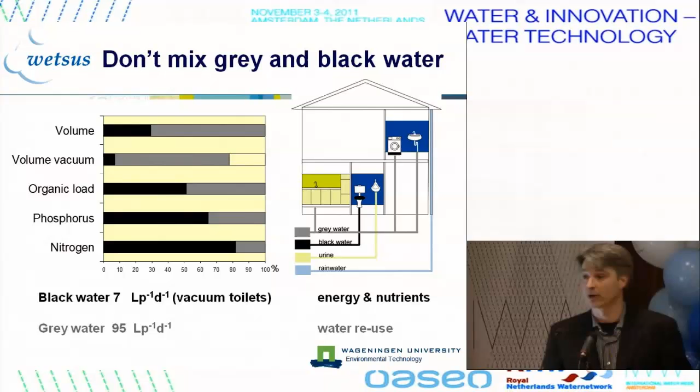Now, this is a demonstration project in Sneek, which is in the north of the Netherlands, and around 32 households are connected to a grey water and black water system. The black water treatment is in the garage of one of the inhabitants of this area. But we collected the brown water, the black water and the grey water and transported it to our labs to do all kinds of experiments.

Now, this is black water composition. This is from a monitoring session of around 3 years, which confirms that the COD is very high. If you calculate it theoretically, it should be around 25 to 30 times as high as in sewage. So you can gain energy from it, and also the nitrogen and the phosphorus concentrations are relatively high.

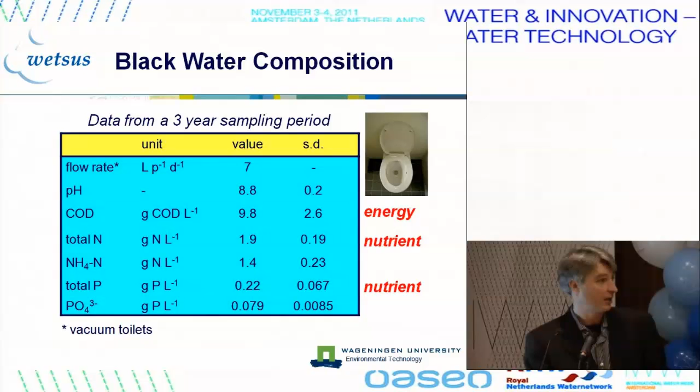Now what we did is we treated this black water in a system consisting of an anaerobic reactor, in this case UASB, then an autotrophic nitrogen removal unit. We were not recovering the nitrogen because we had this rule of thumb that if you have nitrogen below 5 grams per liter, it's useless to recover it and you should simply remove it. It's a different case if you work with urine, for instance, then you're above this 5 grams per liter and then it's worthwhile recovering it.

So we removed it autotrophically, obviously, because we already removed the organics and transformed them into methane as an energy source. And then after the nitrogen removal, we recover P, and that's all we do. We didn't look at the removal of micropollutants, we just looked at the behavior of micropollutants in this system.

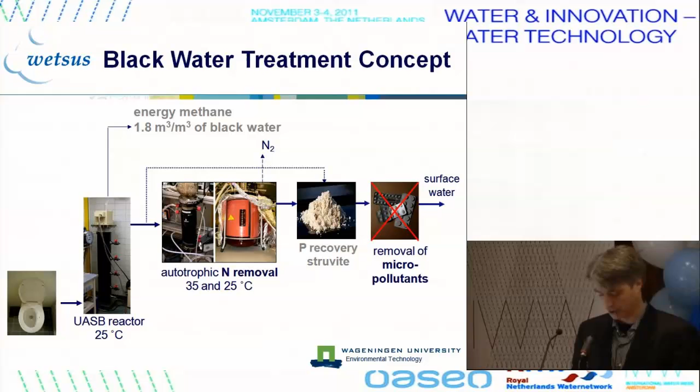Now, if you look at the performance of such a black water system, then I focus a bit on energy because I think it's important to share that with you. If you look at the black water system, you could recover this amount of energy, that's in megajoules per person per year. And if you compare that for the full treatment line of conventional wastewater treatment plants, you lose around 107 megajoules per person per year.

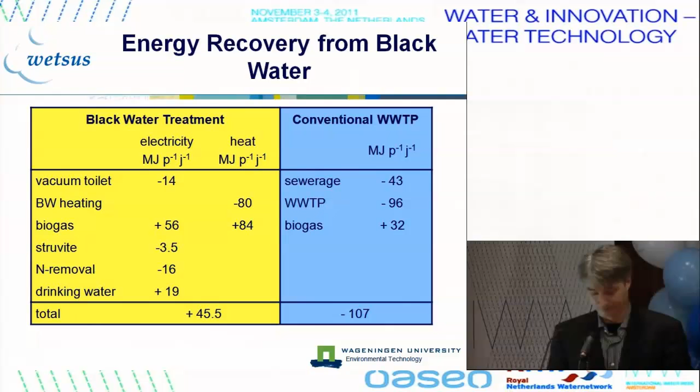So you have a net energy gain from a black water system, which is, it's not a lot, around 5 to 10% of your electricity consumption in your household, assuming that you use around 3,000 kilowatt hours per year. So this is, in terms of energy, a very interesting system.

Now, if you look at the treatment performance, it's not as good as a sewage treatment plant, which is obvious, but if you look at the loads, then the loads for COD, nitrogen and phosphorus are lower than the loads that are discharged from conventional WWTPs. So the concentrations are much higher, but the load is lower.

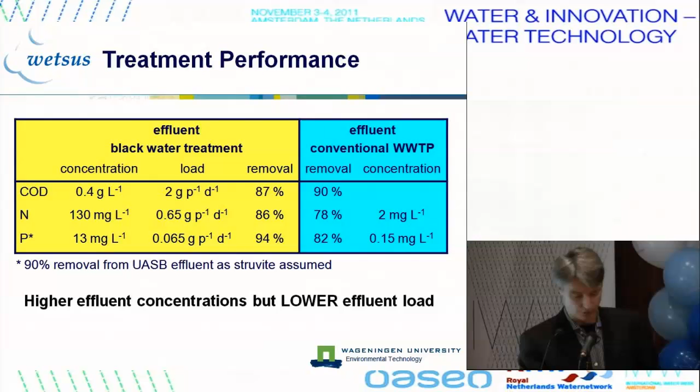Now, micropollutants. And in the case of black water, we're talking about pharmaceuticals. In black water, they are theoretically around 25, 30 times higher than in sewage. That's one thing. They are only partially removed, as far as we know, in wastewater treatment plants. The risks are very difficult to assess, and several effects were reported.

Well-known effects are this feminization of fishes by ethinyl estradiol, and also by Prozac, for instance, in the United States, a reduced freshwater mussel production. So there are some worries, and therefore we decided to start monitoring these pharmaceuticals in black water systems.

We had some selection criteria, which are quite logical, I suppose: that they have potential harmful effects in the environment, reported effects, the consumption, removal in wastewater treatment plants, and we decided to look at several therapeutic groups. Now, these are the compounds we looked at for the black water system.

So we have an analgesic, paracetamol, 2 beta blockers, antihistamine, some antibiotics, some anti-inflammatory compounds, steroid hormones, and an antiepileptic compound. And I'm going to summarize the results in this graph. These are concentrations from left to right. This is, for instance, for paracetamol. This is in the black water. And all compounds were detected in the black water, apart from the hormones, strangely enough.

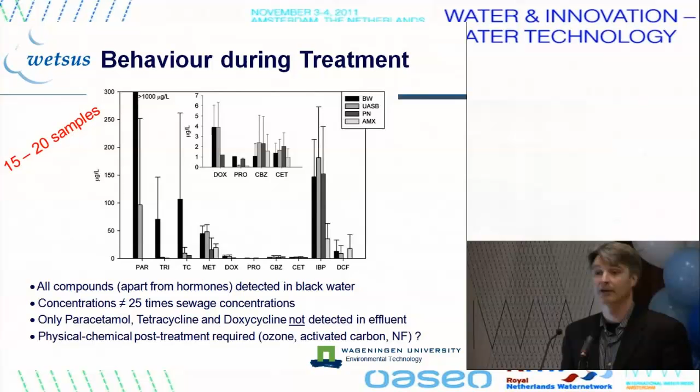Only 3 compounds were not detected, apart from the hormones, in the effluent of the whole treatment line. Those were paracetamol, tetracycline, and doxycycline, which are antibiotics. Now, you could conclude that you need physical chemical treatment because all the compounds are still present in the effluent, but that's of course risk dependent. We don't know. We know that these compounds can be removed quite well by ozone, activated carbon, even nanofiltration. Whether it's really necessary, I cannot say.

Now, then we look at grey water, same procedure more or less. We want to reuse grey water after sufficient treatment for several purposes. And therefore we treated this grey water in 3 different biological systems. We had an aerobic reactor, we had an anaerobic reactor, and we had a sequence of an anaerobic and an aerobic reactor, all operated at the same hydraulic retention time.

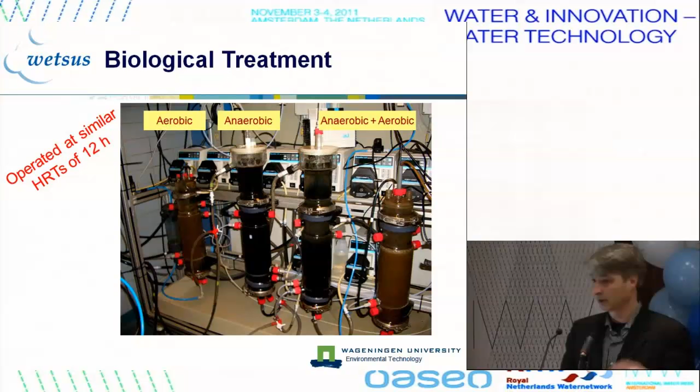Now, if you look at the performance in terms of COD removal, so organic removal, then the aerobic system behaved the best, as you could expect maybe. The anaerobic system, to our surprise a bit, behaved not that good. And probably this is linked to the presence of anionic surfactants, which inhibit the anaerobic treatment process.

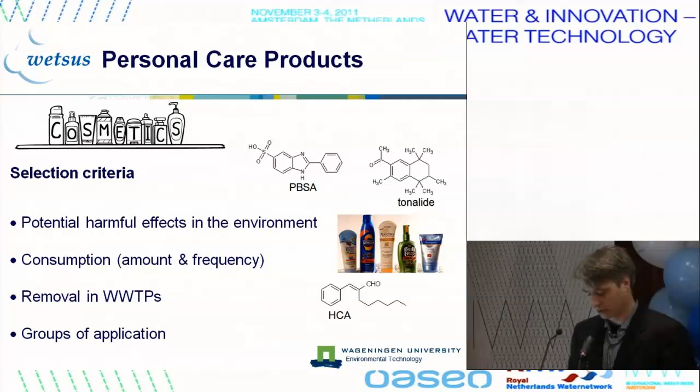Now, in grey water you have a huge amount of personal care products. If you look at your shampoos and the bottles and other products that you use, you can see there's a huge amount of different compounds. We selected quite a bit of those, I think about 18 different compounds, for the same selection criteria we also used for the pharmaceuticals, more or less. And this is the list of compounds we looked at.

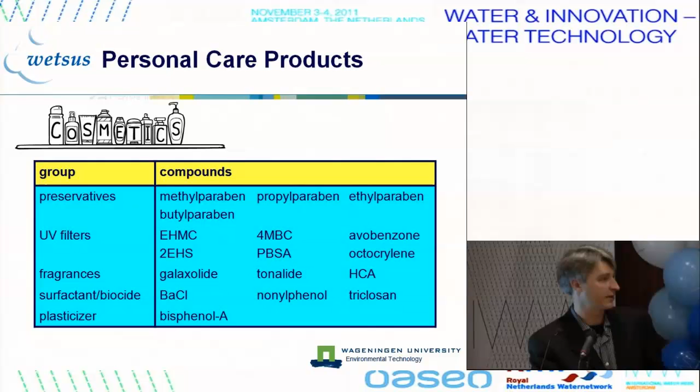We had a couple of preservatives, parabens, many UV filters, some fragrances, some surfactants, biocides, and a plasticizer, bisphenol A. That's what we looked at. I can tell you, by the way, that we hired a Finnish postdoc for 2 years to help us set up all the analysis, because that's a huge effort if you want to do it in a proper way, and it's really, really very difficult to do. Just as a warning if you want to start similar research.

Now, this is the presence of all these compounds in grey water. Apart from 2 parabens, all the compounds were detected in the water. Surprisingly, maybe, nonylphenol is also present in the water, although it's restricted in the EU. So what we suspect is that it's in textile imported from, for instance, Asia, and then when you wash your clothes, it gets distributed to the grey water. That's what we suspect. We can't be sure.

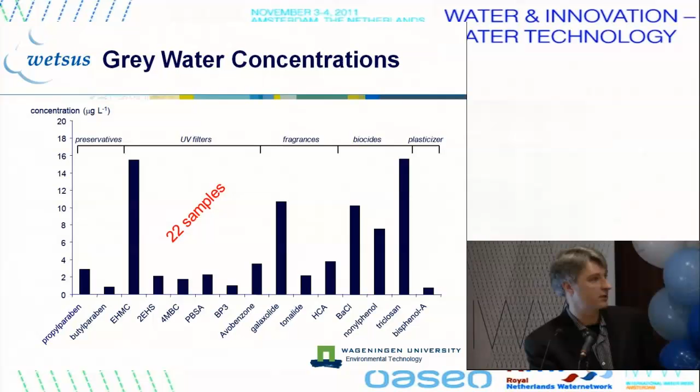Also, this concentration is very high. This is a UV filter. And galaxolide also is quite high. This is a fragrance. Now, this is a summary of what we observed when we looked at removal, anaerobic and aerobic removal. These are a couple of compounds, just example compounds.

Only 2 compounds had a removal efficiency of above 85% in all different treatment systems, so both anaerobically and aerobically. There were 14 compounds which were not removed anaerobically, but were removed aerobically. So aerobic treatment in terms of removal of these micropollutants is the best. And 5 compounds, among them PBSA and tonalide, were not removed at all. Tonalide is a fragrance and PBSA is a UV filter.

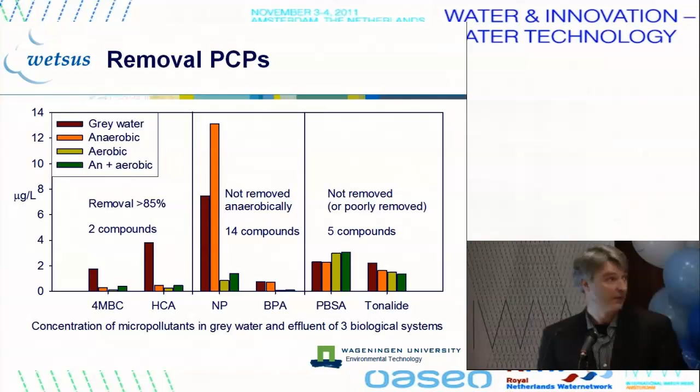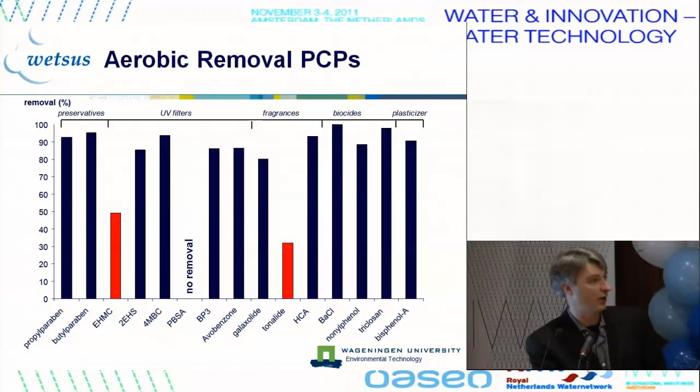Now the removal efficiency, aerobic removal efficiency, focusing in on aerobic removal, seems quite high. Most of them above 80% at least. Only this one, which is a UV filter, PBSA also a UV filter, and also tonalide, where their removal was not very good.

Effluent concentrations, now that shows a similar picture, of course. This one, EHMC, is quite high in the effluent, and also PBSA and galaxolide and tonalide were quite high in the effluent. Now, what does this mean in terms of risk? Well, the answer is we don't know.

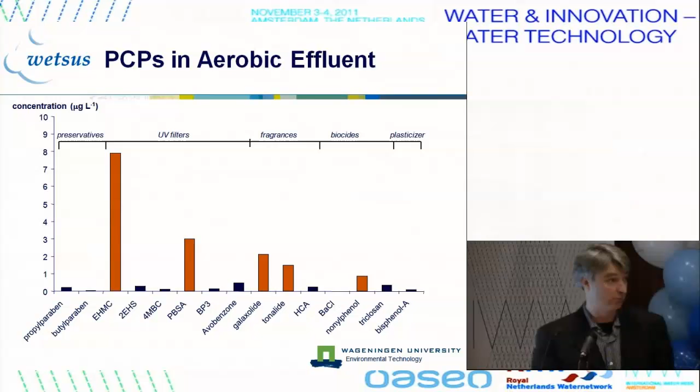Sorry, I forgot something. We also treated the grey water by ozone and activated carbon. And what we saw is that those are suitable techniques. These are ozone experiments. This is the ozone dose, cumulative ozone dose. These are concentrations of the compounds. And what you see is you would need like 10 to 15 milligrams per liter of ozone to remove these compounds. And all were removed quite well, apart from PBSA, which is removed but requires a bit higher ozone dose, apparently.

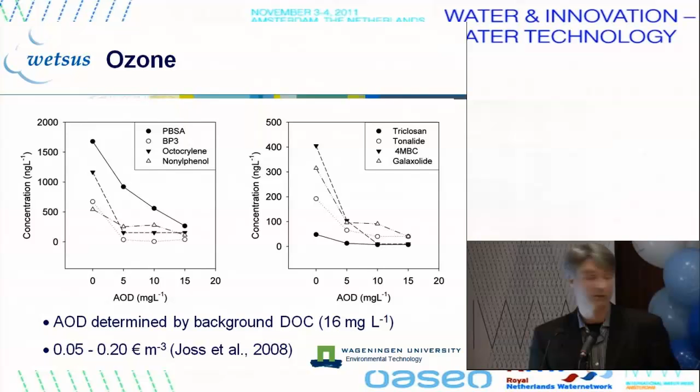Now, it's important to realize the ozone dose is not determined at all by the micropollutants. Those concentrations are very small, but by the background dissolved organic carbon in the water, which is around 16 milligrams per liter in our case. So the background DOC determines the ozone dose. So it also determines the costs, which would be around 0.05 to 0.20 euros per cubic meter, if you want to accomplish this.

Activated carbon, we had many results. Within 5 minutes, the micropollutants are gone. If you mix it with powdered activated carbon, they are gone. No problem at all. But we also used these granular activated carbon columns, and we saw a similar good removal, but we also spiked these columns with micropollutants at elevated concentrations.

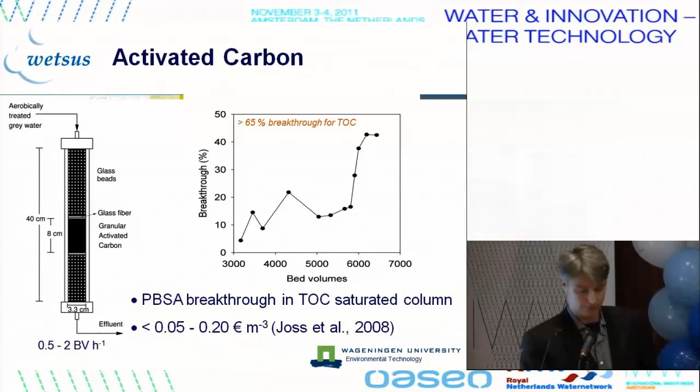Now, risks. We did not do a lot of risk analysis. We tried to check the literature on these grey water compounds, these personal care products. It's hard to find information. What we did is we took the grey water, we checked the concentrations of several potential estrogenic compounds, and we added up from literature for these compounds the estrogenic potency in 17 beta-estradiol equivalents.

And what you then see is if you compare it to sewage, for instance, grey water is much lower in this potency. If you treat it anaerobically, it doesn't change a lot, which matches the removal of the compounds that we saw in the chemical data. But if you treat it aerobically, you go down a lot in this estrogenic potency.

Now, for tonalide, we found a no observed effect level of 3.5 micrograms per liter. And we have in our treated grey water 1.5 micrograms per liter, so it's already close. Now, this compound, which is a UV filter, has a predicted no effect level of 0.4 micrograms per liter. In summertime, we saw much higher concentrations of these UV filters than in wintertime, which makes sense, of course. In summertime, it can be as high as 23 micrograms per liter, so a lot above this predicted no effect level.

But of course, there are unknowns, non-detected compounds in this water. We only analyzed 18, and we don't know anything about the effect of mixtures of these compounds.

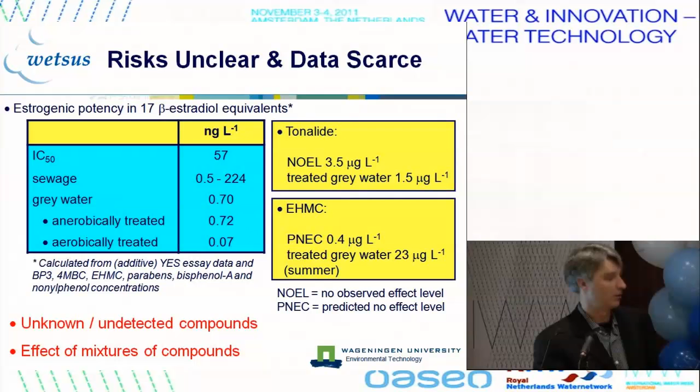We also did, together with the University of Amsterdam, some in vivo tests with Daphnia magna and Chironomus riparius larvae. It showed that grey water has an acute toxicity. Aerobically treated water eliminated mortality but still affected the growth of these organisms. If we applied ozone and activated carbon, it completely removed this acute toxicity, and we even saw some stimulation of growth of these organisms.

Now, what's next? We only looked at the water. We didn't look at the sludges. If you treat grey water and black water, you're also producing sludge, and you want to do something with the sludge. So we're now also looking into the sludge matrices to analyze the compounds in those matrices, which is a difficult job.

We think it's important to develop easy in vitro bioassays for all these different functions of these micropollutants. We do that together with our Department of Toxicology, Tinka Murk. She's working on that. We want to link the concentrations to the responses of these tests. And finally, we want to use this information, perhaps, to develop cheaper and more specific technology to remove these compounds.